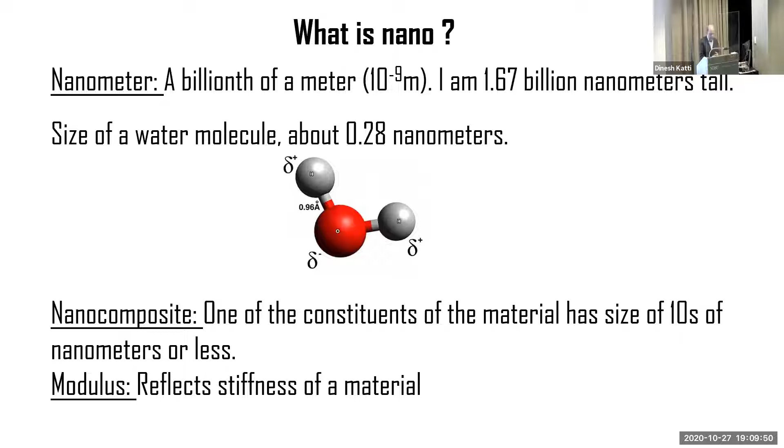So the first nanocomposite material I'm going to talk about is nacre, which is the iridescent inner layer of seashells. Now, seashells are these wonderful armor materials that protect the organisms that reside within them. The outer region of the seashell is a calcitic mineral, and this calcite is basically very strong and very brittle or very hard. On the other hand, the inner layer of seashell, which is called nacre, is strong and tough.

And now material scientists have been interested in nacre for a very long time. So the composition of nacre is 95% aragonite. Aragonite is a calcium mineral similar to chalk. And the remaining part of the nacre are organics. It's basically a cocktail of proteins.

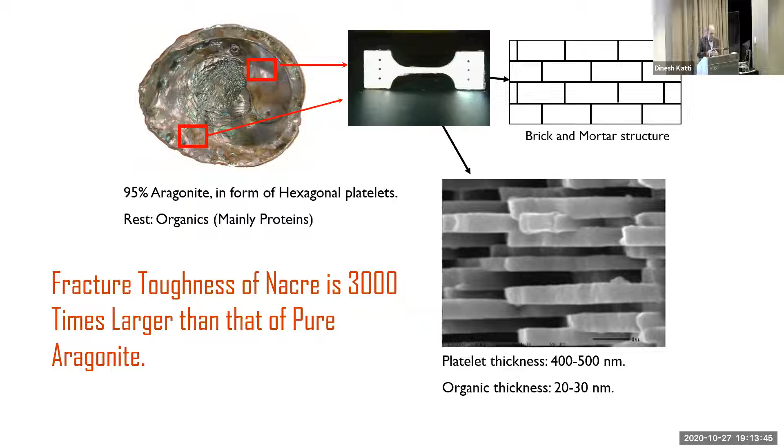And so we decided to use a radically different approach and use computations and mechanics to explore nacre and find and delineate the structural reasons why nacre has such amazing fracture toughness, or resistance to fracture. And so the first thing we did was to build a structural model of nacre down to the nanometer scale. And then we used, at that time, some of the world's fastest supercomputers to do our simulations.

And at that time, we did not know what the elastic modulus of that 20 nanometer thick organic phase was. And our simulation showed that the elastic modulus of this organic phase is about 20 gigapascals. Now, that number, 20 gigapascals, is about 1,000 times more than what we were expecting. And the reason why I'm saying 1,000 times more is because this organic mortar is made up of proteins. And if you look at the bulk proteins, they have elastic modulus of only 20 to 50 megapascals. That's 1,000 times less than this number.

Well, the first thing, of course, we did was to go and check all our numbers, whether our numbers were correct. And we were very confident that our numbers were right. And then we went ahead and presented this work in the fall of 1999 at the Materials Research Society with a high-profile Frontiers in Materials Research Symposium. And after we presented this work, about half the researchers in the audience could not believe that number. But there were several people in that audience who said, you know, this has never been tried before, using computations to explore materials. And you guys might be onto something.

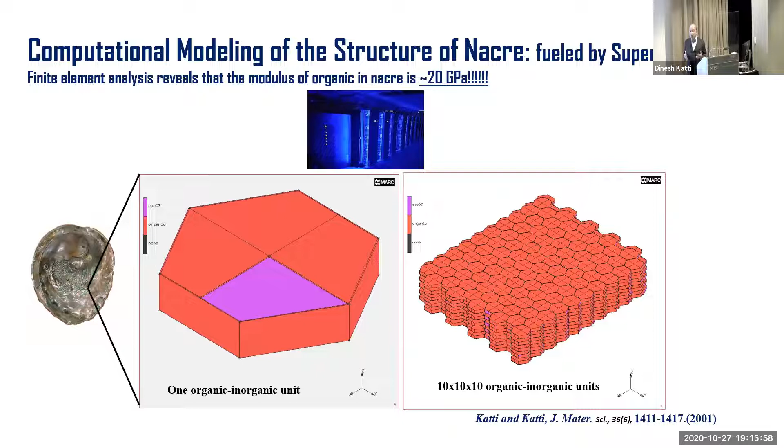Well, a year later, some experimentalists at some other universities actually did experiments to find the elastic modulus of nacre in the 20 nanometer size region. And they confirmed what we had predicted a year before. And that gave a big boost to using computations to explore materials. And then subsequently, other groups in the country also started using this technique. But this still did not answer the question why the fracture toughness is so high.

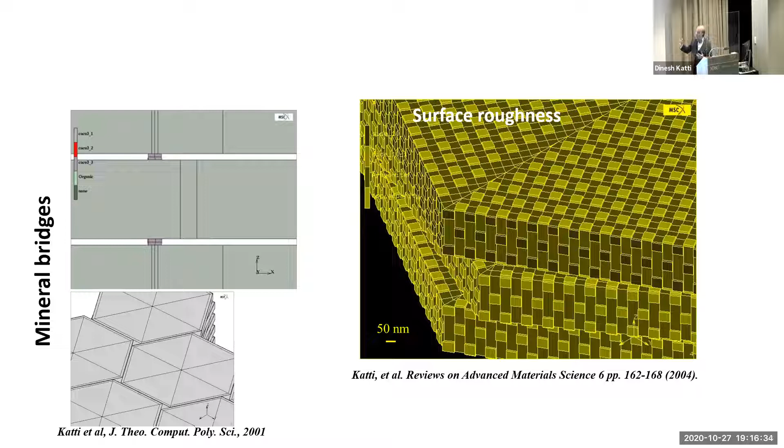And so we scoured the literature, and there were many speculations and theories that some features like mineral bridges, and mineral bridges are important for the growth of seashells, so mineral bridges or surface roughness might be the reason why we have this high fracture toughness. And so what we did was we built computational models of all these different features and tested them computationally and found that none of these contribute to the toughness of nacre. And so basically, we were at a dead end here. We did not know what to do next.

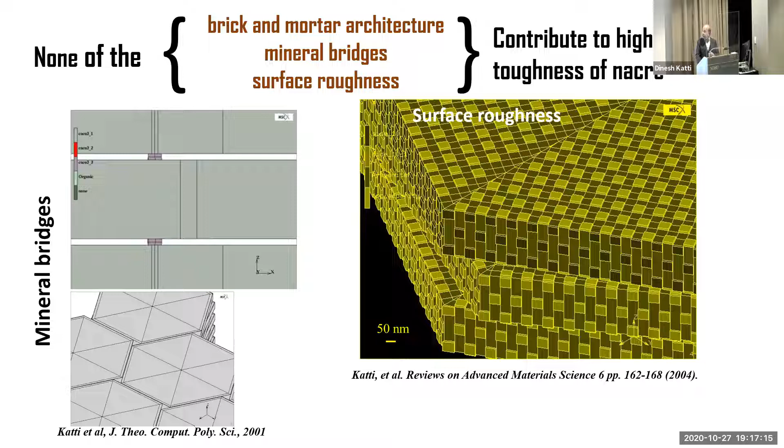But what we decided to do was to do our own experiments. We said, all right, let's do our own experiments, break the nacre, and look at the fracture surfaces. And then maybe that might give us a clue why the fracture toughness is so high. So what we did was, our students meticulously carved out the nacre samples from the seashells. And then we pulled those apart, put those samples in a scanning electron microscope and looked at the microstructure. When the very first image came on the screen, we just jumped out of our seats.

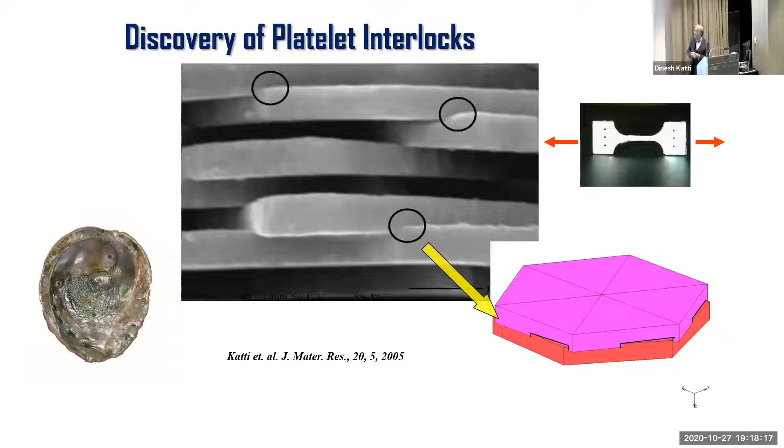What we saw is that these bricks were not just sitting one over another like a brick wall, but each brick was locked into the other brick. So the circles here show you how the bricks are locked into each other. So the bricks are not just sitting one over another, but locked into one another. Now, we wanted to be certain that this is the reason for fracture toughness. So we spent a year building models of these interlocks. And then we did our simulations.

And what we found is that because of the progressive failure of these millions of interlocks in this nacre, we get this very high fracture toughness. So basically, what our work showed is that the platelet interlocks are key to the fracture toughness and strength of nacre. And that was an incredible result because people had been trying to find the reason for high fracture toughness, and we were able to find that, and we felt good about it.

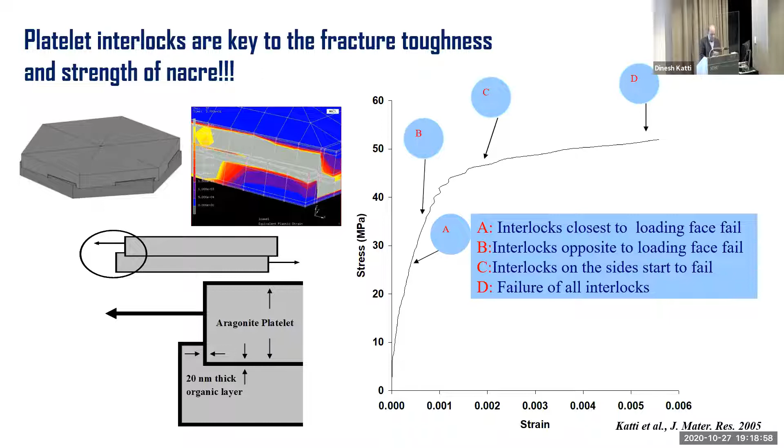But while we were doing our experiments, we found something else, which was very interesting. The mortar between the bricks was very stiff. It had an elastic modulus of 20 gigapascals, so it is a very, very stiff material. And typically when a material is stiff, it is brittle.

But here what we found is that not only is that organic mortar very stiff, but it can also deform a lot. It can stretch a lot. And that was fairly a unique property here. And so we decided to investigate this further. Why is it that this is happening?

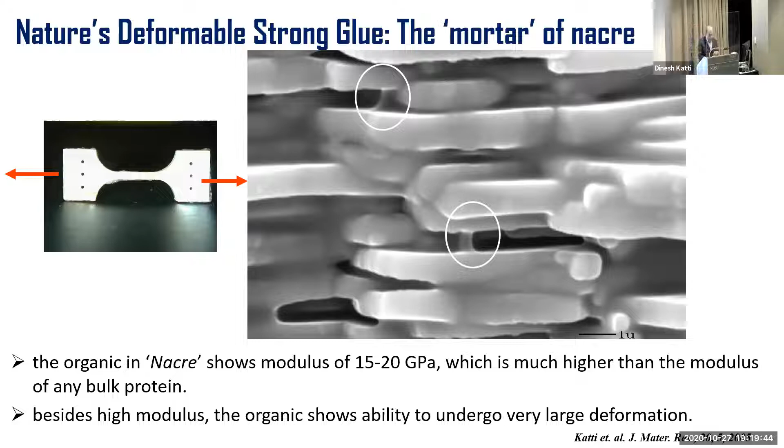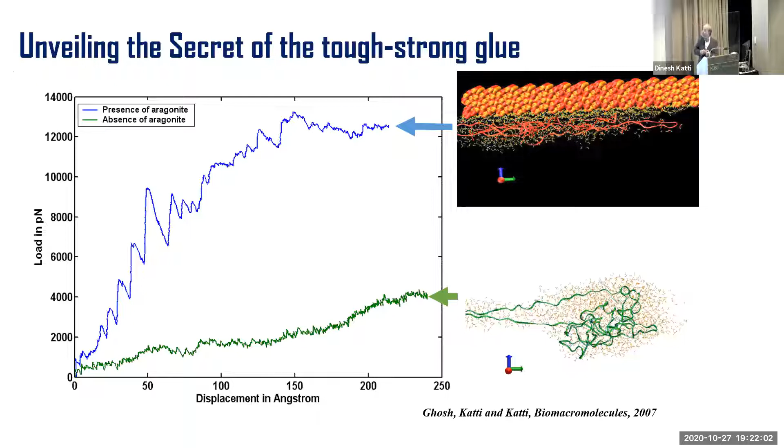And so this sort of answers that question, that why is it that the organic phase is very stiff, at the same time it can deform or stretch a lot. And so basically the proximity of that mineral actually influences the protein. And that was a big result that came out of our work. And so basically what we did was we wrote the recipe for the design of biomimetic structural nanocomposite. And with this recipe, now we can design new materials which are light and which are super strong.

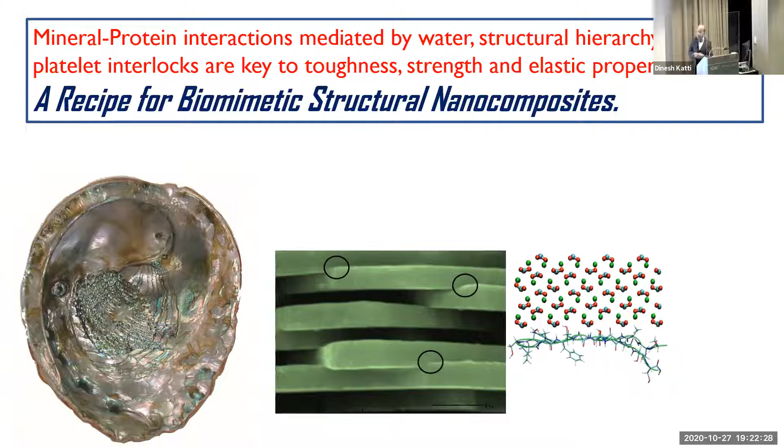And so one of the major defense contractors in this country has shown a lot of interest in the use of some of these findings in the design of the hulls for the next generation submarines. We also see the application of these materials for aircraft and spacecraft and cars and bridges and other structural applications. And we thought this was a pretty cool ending to that story.

The next nanocomposite material I'm going to talk about is the bone. Now, the bone is a composite material or nanocomposite material made up of collagen, which is a protein, and mineral, which is the hydroxyapatite, say, a calcium mineral. And the beauty about bone is that it has this structural hierarchy. Structural hierarchy means that it has organization at many length scales.

So if you see here in this figure, the left-hand side bottom, that's the molecular scale where you have the molecules of collagen, which is the protein, and then you have the mineral hydroxyapatite, which have the size range of nanometers. And so that's a molecular scale. So what happens is that we have an organization that starts from the molecular scale and goes all the way to the whole bone. And that's absolutely beautiful.

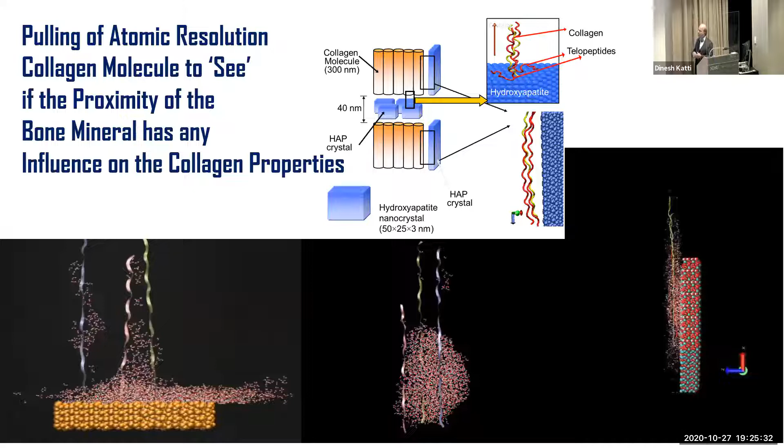for bone diseases. And so what we did was we pulled the collagen to see if the proximity of the bone mineral has any influence on the collagen properties. So basically what we did was we took the collagen and put it next to the mineral in all these different orientations which you see in the bone. And then we also compared that with the collagen without the proximity of the mineral. And we did that, and these are the results.

And basically what we found is that when collagen is in the proximity of the mineral, a much higher load or force is needed to pull that collagen compared to the situation without the mineral, just like in nacre. Okay, so again, we see similarities between nacre and the bone here. In fact, this is telling us that the mineral is influencing the collagen in its proximity. Now, up to this point, the collagen and the mineral were always treated separately.

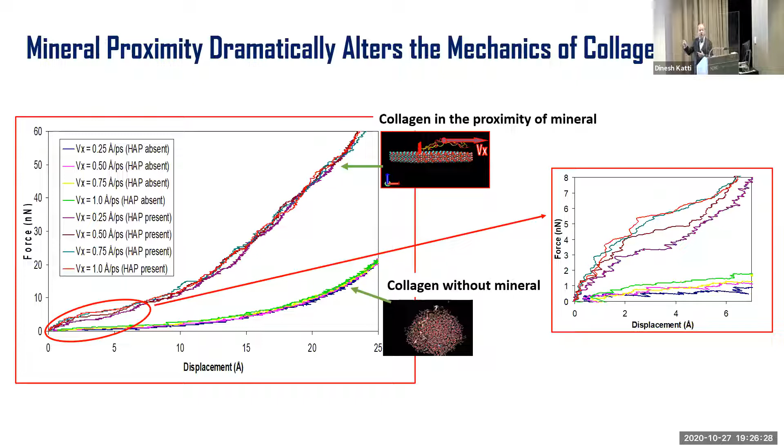This tells us that there's a very intimate relationship between the mineral and collagen, and that needs to be considered. But we wanted to see, so what's the connection between what is happening at the molecular scale and the bone itself? And to do that, we did what's called multi-scale modeling. Basically, in multi-scale modeling, what we do is to bridge what happens, in this case, at the molecular scale to what is happening at the next scale, at the fibril scale, and then to the bone. So we build these bridges between these lengths. And we did that, and we found something very interesting.

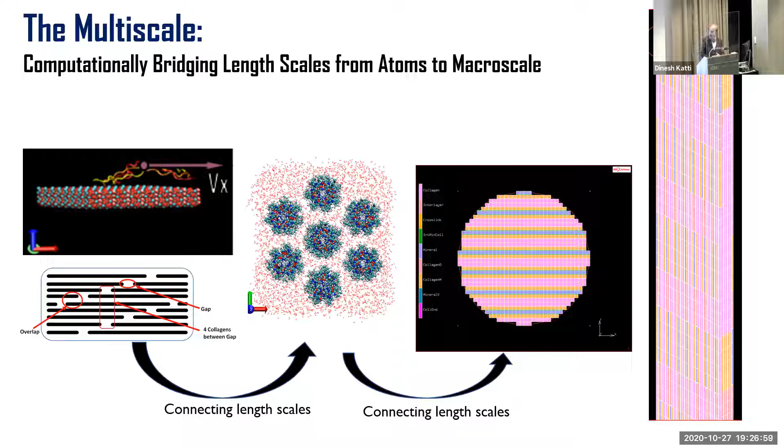We found that the mechanics of bone is dramatically influenced by molecular interactions between mineral and collagen. To give you some numbers, 20% of the elastic modulus of the bone is because of the molecular interactions between the collagen and the mineral. And you would say 20% doesn't seem like a big number. Well, that's the difference between the elastic modulus of a bone of a 25-year-old healthy male and an 80, 85-year-old osteoporotic female. So that 20% is huge, which means that the contribution of the molecular interactions between the mineral and the collagen on the bone properties is very significant. And so this changes the way we understand bone health and potentially cure bone diseases.

While we were studying the bone, we were intrigued by this collagen, which is one of the two components of the bone. And collagen also happens to be the most abundant protein in the human body. Now, at that time, when we started investigating, all the literature, all the work that was being done was on the short 8.5 nanometer long representative collagen molecule segment. In fact, the actual collagen molecule in the bone is 300 nanometers long. And so what we decided to do was to build a full-length collagen molecule and do molecular dynamics simulation. It's extremely expensive. We need high-performance computers, supercomputers, to be able to do that. But we were able to do that.

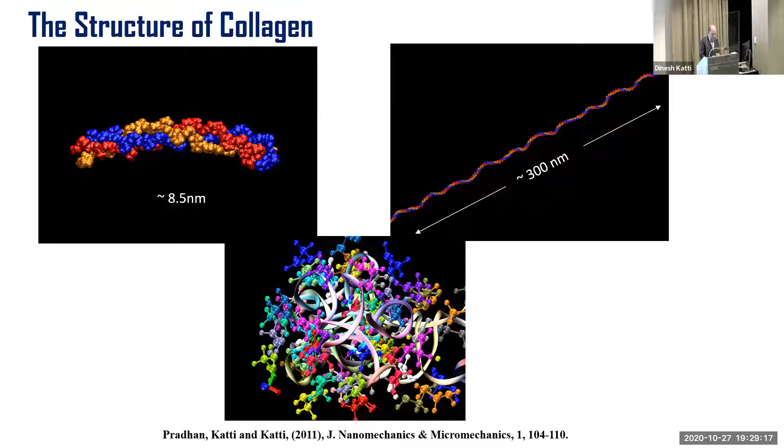So let's first see what is collagen. Collagen is made up of 3 strands of proteins. Each strand is a helix. So it has this turn, so it's a helix. And the helicity in this strand is a left-handed helix. Now these 3 helices get together to form this famous triple helix in collagen. Now this triple helix was discovered by Professor Ramachandran at University of Madras. And at one time, it was even called the Madras helix. This is the structure of collagen, the most abundant protein in the human body.

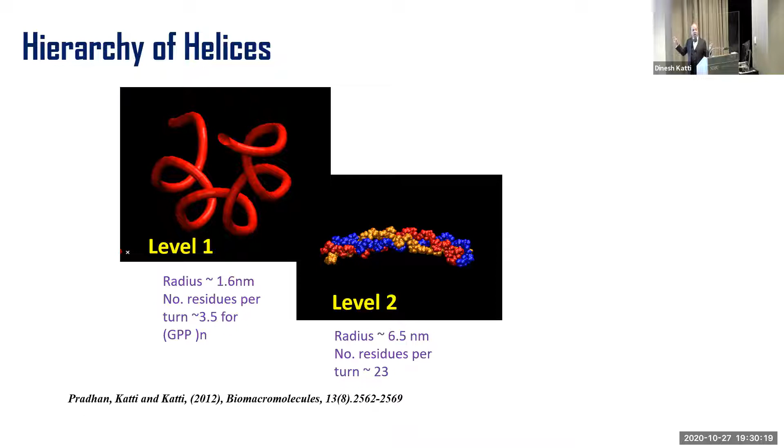And so what we did was to run simulations for the full length 300 nanometer long collagen. And so we did that. And what we discovered was that there was a third level of helicity in the collagen. So basically, this triple helix twists at a pitch of 15 nanometers. So not only do we have this triple helix, but the triple helix itself twists in a right-hand helical manner. And so that was a major discovery coming out of our group on the collagen. But then, like every engineer, so what's the point? I mean, what does that mean?

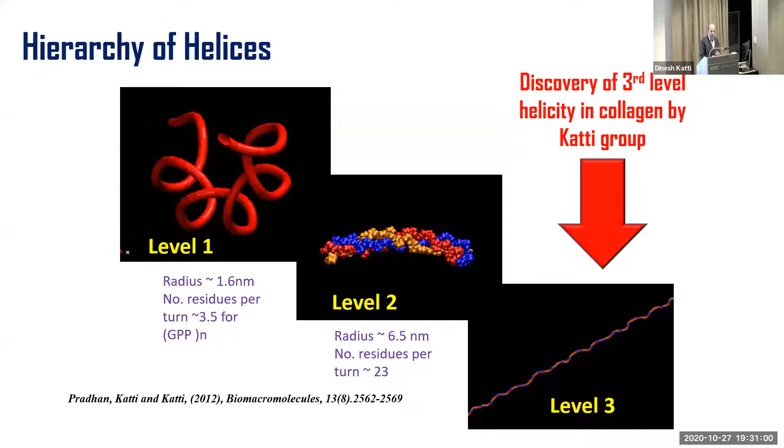And so we did a lot of simulations, and what we found was that level 3 helicity contributes to almost half of the total deformation or stretch of the collagen in bone. So that is significant. And up to this point, it was not even known that there was a level 3 helicity there. But the level 3 helicity during the normal day-to-day activities of a human being contributes to half of the stretching or deformation.

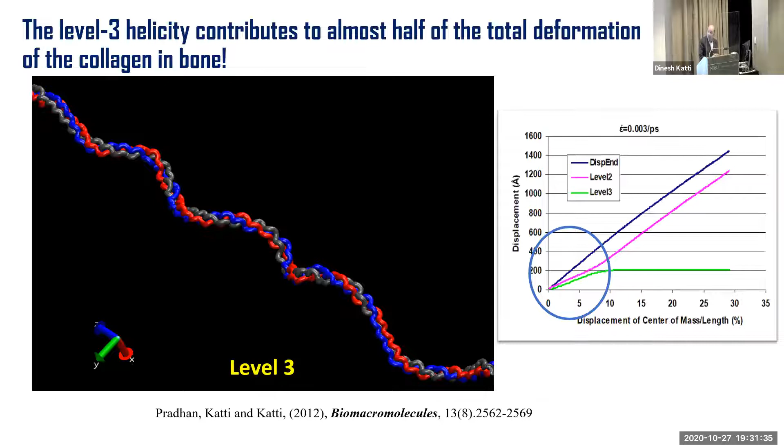So the takeaway or the summary of this work on bone is that mechanics of bone is significantly influenced by molecular interactions between collagen and the mineral. Interchain, non-bonded interactions, hydrogen bonds, and structural hierarchy control collagen mechanics. And level 3 helicity of collagen has important structural implications in bone mechanics.

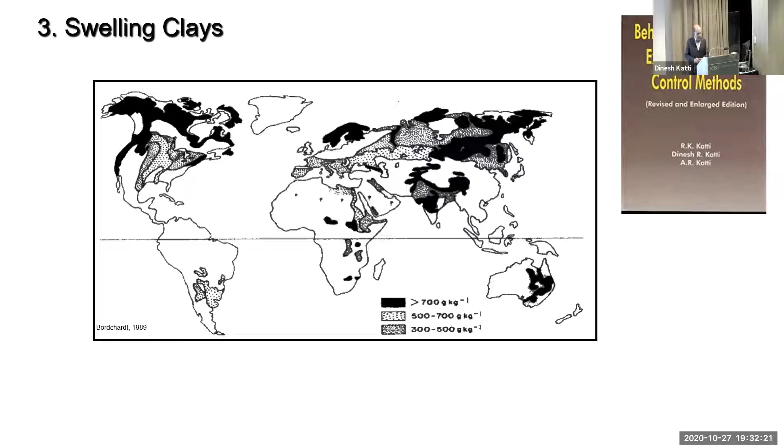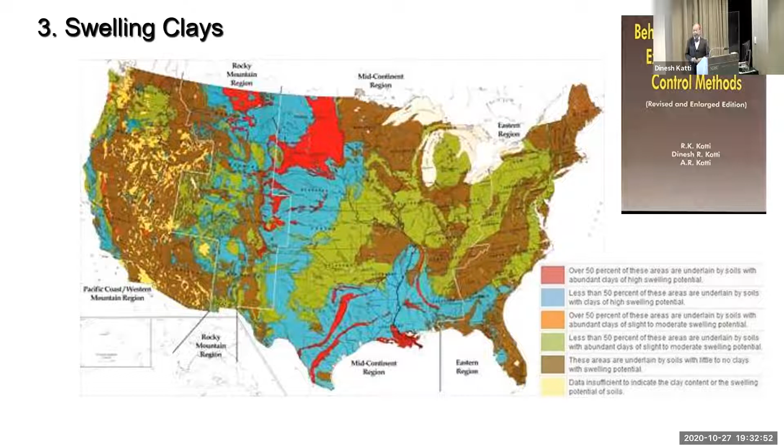And so when water enters these clays and hydrates them, the swelling clays swell. And because of that, the ground heaves. When the ground heaves, it causes damage like cracks in buildings, cracks in roads, sometimes failures of structures, landslides. So a lot of these things happen because of the swelling of these swelling clays.

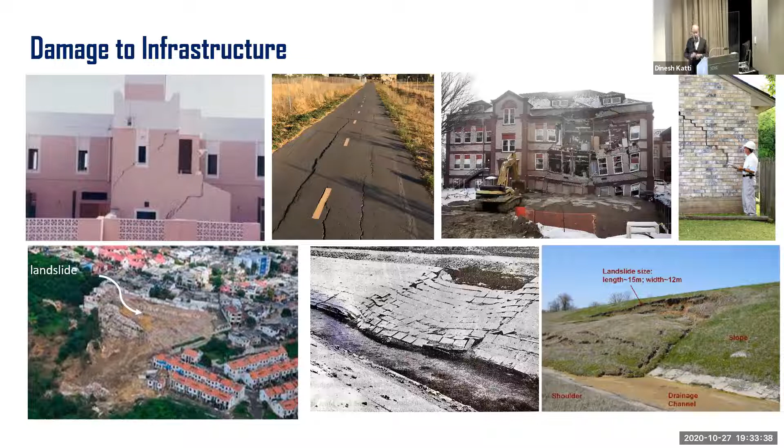In fact, the damage caused by swelling clays is of the order of $20 billion every year in the United States alone. So that's huge. And so the problem is that the current soil mechanics theories are incapable of predicting clay behavior. I know it's a bold statement, but that's the truth. And this results in poor design of infrastructure. And this is a challenge for the $10 trillion per year global construction industry.

And so because of the magnitude of the problem, we decided this is a challenging problem, we need to work on this. And so what we did was to do a very fundamental study of clays, trying to understand the relationships between the clay fluid molecular interactions and the engineering properties of clays. And in order to do that, we introduced molecular modeling or molecular dynamics in the field of geotechnical engineering.

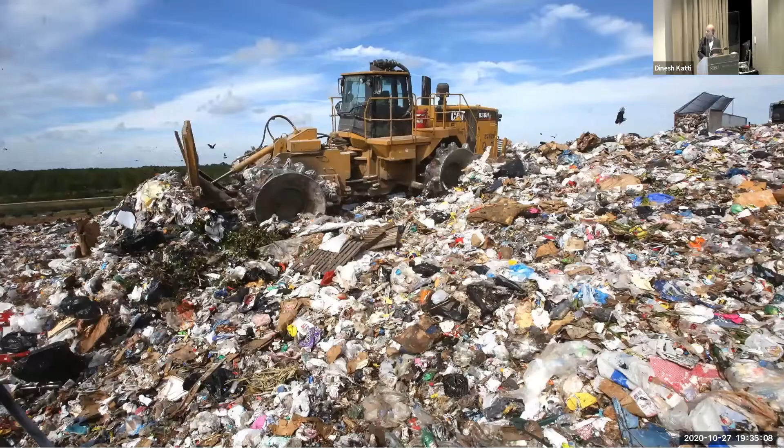And from that work, what we found is that the molecular interactions between clays and fluids not only significantly influence, but control the engineering properties of clays. So I'm going to give you one example of how molecular interactions control engineering properties of clays, and that's the flow of fluids through clays.

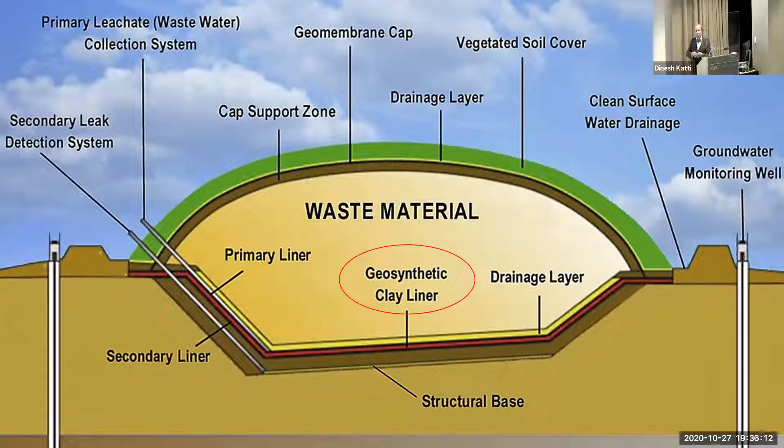And so what you see here is garbage in a landfill. Now, the landfills are lined with what's called a geosynthetic clay liner. Basically, it's a liner made up of swelling clays. And the point of having that liner is to prevent the fluids in the garbage or in the waste material from flowing through and contaminating our groundwater. So we wanted to see how the fluids which are typically in a landfill are interacting with the clays in the clay liner.

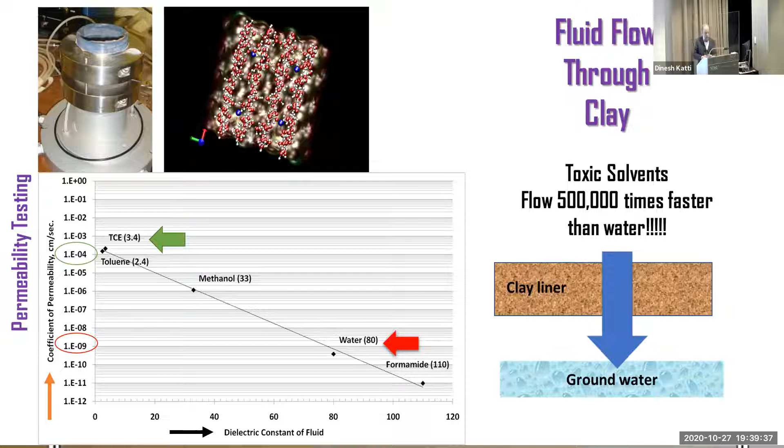On the other hand, when you look at toxic solvents like TCE and toluene, actually EPA has called both TCE and toluene among the top 10 most toxic substances found in our landfills. When you look at TCE and toluene, that number jumps up from 10^-9 to 10^-4. It's a huge jump. In fact, if you look on the right, toxic solvents flow 500,000 times faster than water through this clay liner. That's huge.

And so what does that number, 10^-4 centimeters per second, mean? Well, if you go to a beach, take water and pour it on the sand, the water simply percolates very quickly through the sand, and it disappears. Exactly the same thing happens when TCE or toluene is poured on top of the swelling clay. Basically, the swelling clays in this clay liner are ineffective in preventing these very toxic solvents from flowing through. They're great at stopping water, but they're ineffective in stopping these solvents which have very low polarity and don't interact much with clay. So again, the question, why does this happen?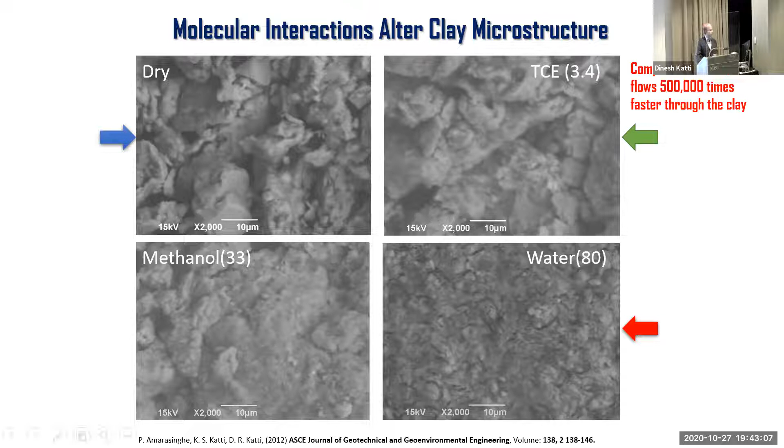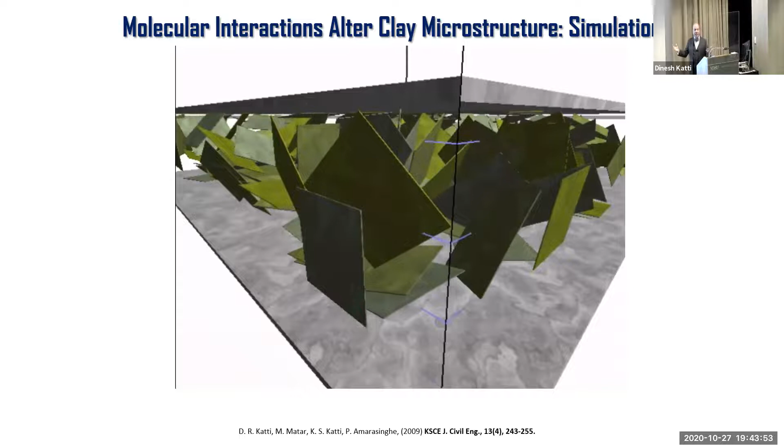So now we also did discrete element modeling simulations, and you can see those void spaces being filled up by broken particles. So the particles which are broken down, they fill up the void space and basically seal off the clay and prevent water and other high polar fluids from flowing through, creating a perfect barrier. So because of molecular interactions, particles break down and fill up these void spaces and seal off the clay. But non-polar fluids which do not have very strong molecular interactions with clay do not break down the particles and do not create this perfect seal. Okay.

Now we see the same type of thing happen with compressibility of the clay, the compression of the clay. And we find that clays, depending upon the nature of the fluid in the pores, compress more or they compress less. And again, that has to do with the molecular interactions between the clays and the fluids. So basically what we have found again here is clay with polar fluids, that is the fluids which interact the most with clays, are less compressible. But if you replace the fluids with low polar fluids which interact less with the clays, you have more compression.

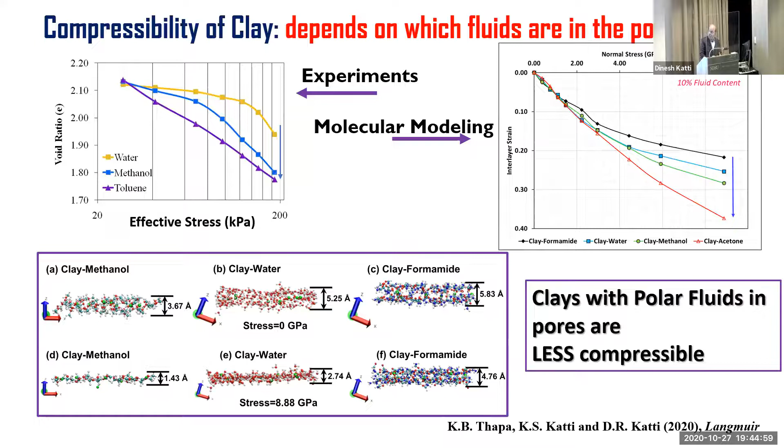So that's another engineering property. An important engineering property in addition to the flow properties is the compressibility. And we see exactly the same thing happening for the strength properties. Okay, so basically what's going on is molecular interactions are changing the microstructure of the clay, and those in turn change the engineering properties of the clay, and also the molecular interactions directly alter the engineering properties of the clay.

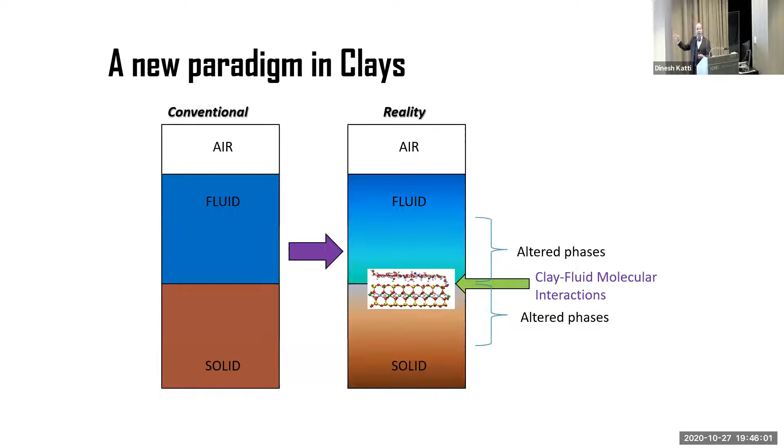Now, the engineers, the people who are designing with these clays, are used to this clay as made up of three components: air, fluid, and solids. That is conventional soil mechanics. But what we are saying, based on all this evidence, is that clay-fluid molecular interactions are key for accurate prediction of clay behavior. So if you do not consider clay-fluid molecular interactions in clays, you are not going to be able to accurately design with clays. And so molecular interactions control properties of clays: soil mechanics revisited.

Now, the last nanocomposite material that I'm going to talk about are polymer clay nanocomposites. When you add small amounts of nanosized clay, we are talking about 1 to 10% or less, and the key is nanosized, that's important. If you add small amounts of nanosized clay in a polymer, which could be nylon or polyethylene, the common polymers, there's a 500 to 600% increase in the elastic modulus or the stiffness of the material.

So why is it that when you add very small amounts of nanosized clay, we see this huge jump in mechanical properties of the composite? Well, polymer clay nanocomposites were developed by Toyota Motor Company in 1990. And really nobody knew why this happens.

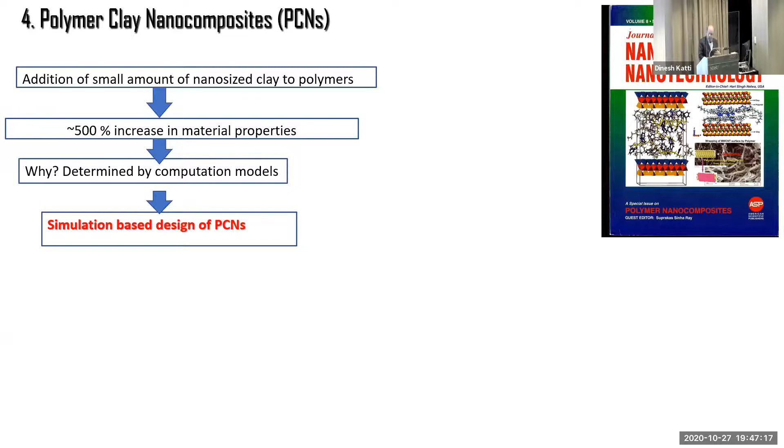And so we decided to take on that challenge. And what we did was, again, a huge amount of simulations. So we got down to the molecular scale, studied the interactions going on between the polymer and the clay and the modifier and all of that. And we also built multi-scale models, basically models that span different length scales. And from that, we came up with this

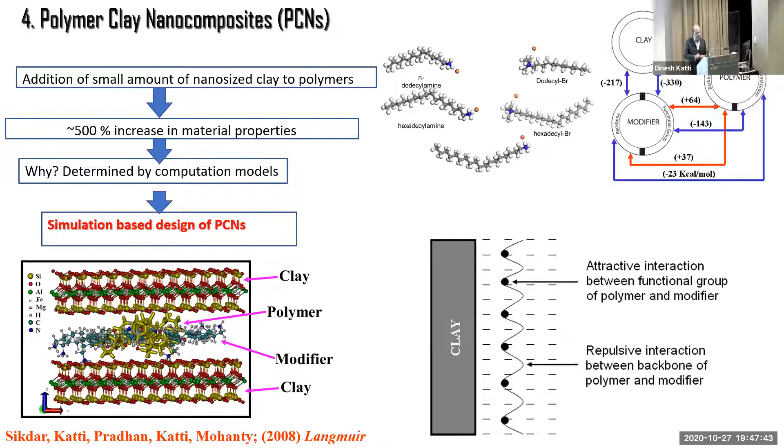altered phase theory. Now, it looks like sunny side ups, but this is our altered phase theory. It's one of those situations when you sit down at a desk with a student, you're discussing something, you sketch out something, and then that ends up in the paper, and then it becomes something everybody agrees about. Anyway, so the yellow yolks which you see here represent the clays.

And the light blue is the polymer. And because of the molecular interactions between the clay and the surrounding polymer, a large volume of the polymer is altered. The mechanical properties of the polymer in the altered zone are many times more than the mechanical properties of the unaltered zone. So what is going on is, these clays, when they are well dispersed, and again nano-size, actually alter the polymer.

And so we call this an altered phase theory, because these clays are actually altering. And that's the reason why, when you add small amounts of clay and the clays are well dispersed in the polymer, we see this huge jump in the mechanical properties of the polymer clay nanocomposite. So subsequently, we took this theory and built simulation models so that we could design polymer clay nanocomposite materials with tailored, predictable properties for structural applications and so on.

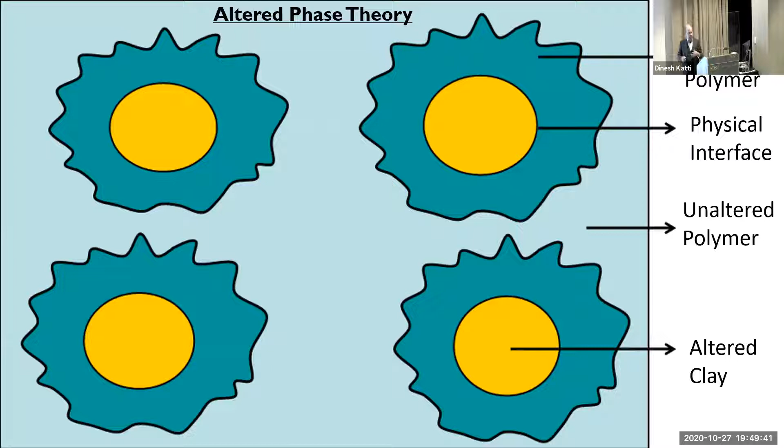But we also decided to use polymer clay nanocomposites in tissue engineering. Now, let me briefly tell you what tissue engineering is. In tissue engineering, we take cells from a patient, and then we grow those cells, and the cells proliferate. Basically, they make more cells. And once we have a sufficient number of cells, we seed them onto what are called scaffolds. Scaffolds are simply very porous structures, a material and a structure with a lot of porosity. Almost 90% is air.

And then we give it heat, proper temperature and food, and the cells grow in the scaffold and they make tissue. Now, as the tissue is made, the scaffold starts to degrade. And we want the scaffold to degrade because we want the tissue to take the shape and form of the scaffold. And so somewhere in between, we take the scaffold and put it back into the patient. And so now the patient has a tissue made out of his or her own cells. And that is tissue engineering.

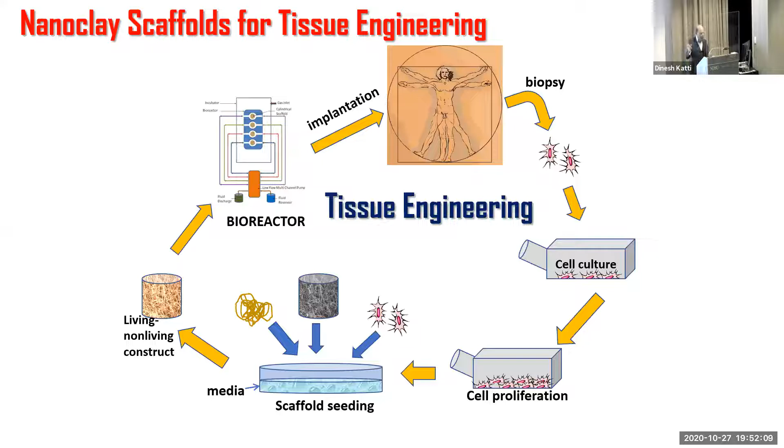Now, several years earlier, it was just one of those intellectual curiosities about whether the amino acids in the proximity of clays can make polypeptides or proteins. There was some speculation, some theories that clays are the reason why amino acids get together and make proteins. And we said, can we simulate that? And what we found is, yes, the proximity of the amino acids is such that you could create the polypeptide bonds and probably make proteins. But something else we found is that amino acids can make nanoclays from clays.

Now, amino acids are biocompatible, and clays themselves are biocompatible. So now we have nanoclays that are biocompatible. So we immediately remembered these simulations which we had done. Actually, in 2007, we published this work, and then we had just forgotten about it. This is one of those papers that had got a lot of citations, but we just didn't think much about it until we came across this problem.

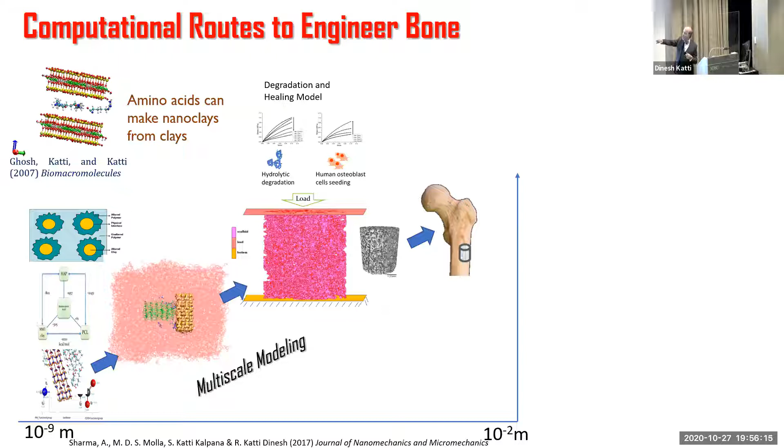So we wanted to provide those tools, and we were able to do that through what we call multi-scale modeling, where we bridge what happens at the molecular scale all the way to the implant scale. So we are able to do that.

Now I'm going to show you some pretty pictures. I think they're pretty. The picture on the top is a picture of the nanoclay scaffolds. Those are the scaffolds. The picture in the middle shows the human mesenchymal stem cells growing on these scaffolds. They're attached to the scaffolds and they're growing.

And the bottom right picture is the picture of the regenerated bone when you look at it through an atomic force microscope. And this regenerated bone has the same hierarchy as that of a natural bone. It has the same beautiful hierarchy. It has all of those features. Not only that, the mechanical properties of this bone are the same as that of a natural bone.

So basically, we have regenerated natural human bone from human mesenchymal stem cells on our nanoclay scaffold systems, and we also have all of these predictive capabilities in order to do that. And now, of course, this work is going further. The regenerated bone work is going further. We are now going into a translational mode where we are taking these scaffolds, putting them into animal models, and working with some companies on that.

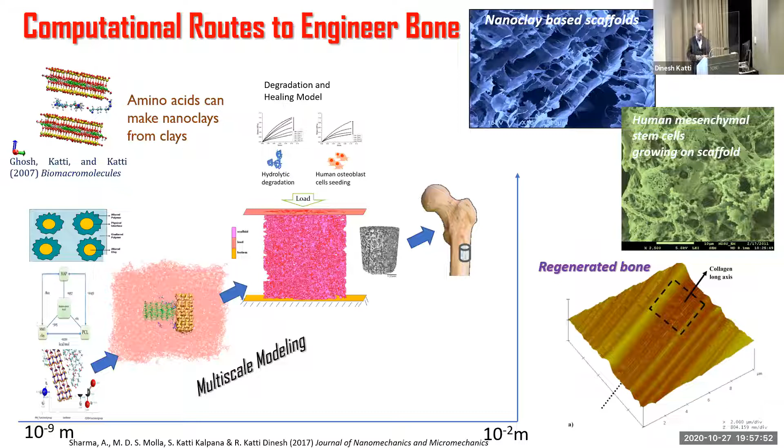Now we have created this beautiful natural bone in the lab, regenerating natural bone. Now this regenerating bone is also a niche for prostate cancer and breast cancer to go to or migrate to. That's metastasis. So both prostate and breast cancer can eventually migrate to bone, and when that happens, it's terminal. At this point, there is no cure when that happens.

So we said, all right, these two cancers actually like the regenerating bone environment. How about we put these prostate and breast cancer cells on this, seed them on this regenerating bone while bone is being regenerated? So we did that. And when we did that, we found that we were able to create the tumors and the cancer environment just like it happens in real life, in the bone. So these were the first test beds for cancer bone metastasis, which came out of our group.

And of course, the advantage of this is that we can use it for understanding cancer biology. We can use it for designing new drugs and so on. And we made use of this. So we made use of the tumors from our test beds. And what you see here are the cells within the tumor.

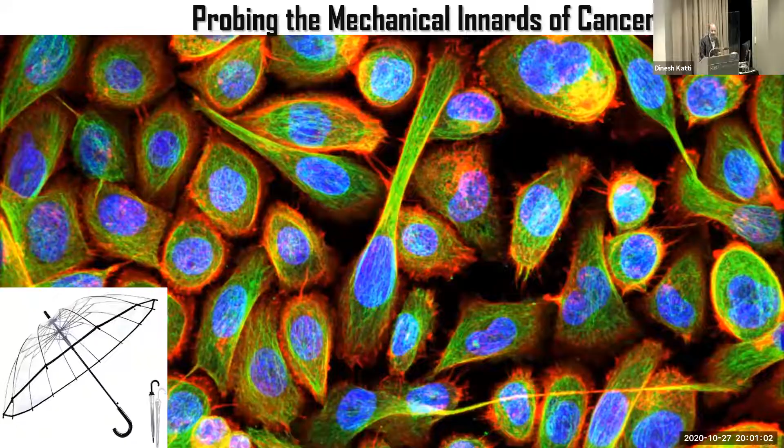so what we did was to build the first high-resolution mechanistic breast cancer model of cancer cells. So basically, on the left-hand side, you see a cancer cell attached to the scaffold. That's a breast cancer cell. And on the right-hand side is the model, finite element model of our cell. And this cell has all of the mechanical features of interest for cancer cells.

So it has the cell membrane, it has the cytoskeletal elements like the actin filaments, the intermediate filaments, the microtubules. Then also it has the cytoplasm and then the nucleus. So basically this cell can capture all of the internal structure necessary for the mechanical response of the cell.

And what you see down there, the figure at the bottom, is the simulations where we have taken an indenter, or we are pressing the cell down. Okay, so we are pressing that cell down. And as we press the cell down, we can go inside the cell and see what's happening to all of these different cytoskeletal elements. And so we can get a very good picture of how the cell responds when it is subject to external stress conditions or loading.

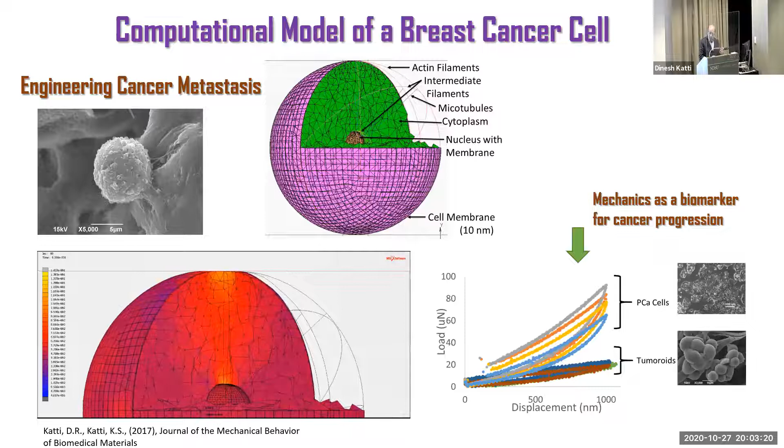Okay, so now we go even deeper. We go inside the cell and look at one of the cytoskeletal elements, and that is actin. And why we are interested in that: left-hand side top is the picture of actin, which is spread throughout the cell. But when the cells get together to form a tumor, that's the figure on the left bottom, the actin migrates to the cell boundaries. So it's no longer distributed throughout the cell, but moves towards the cell boundary.

If we are able to capture this actin dynamics, that is the changes to actin from cells to tumors, we'll be able to do a good job with predicting cancer progression. And so on the right, this is just hot off the press. You are seeing the actin molecules being stretched and pulled and twisted, and we're trying to understand the mechanical behavior so that we can feed all of that into what we are seeing on the left-hand side.

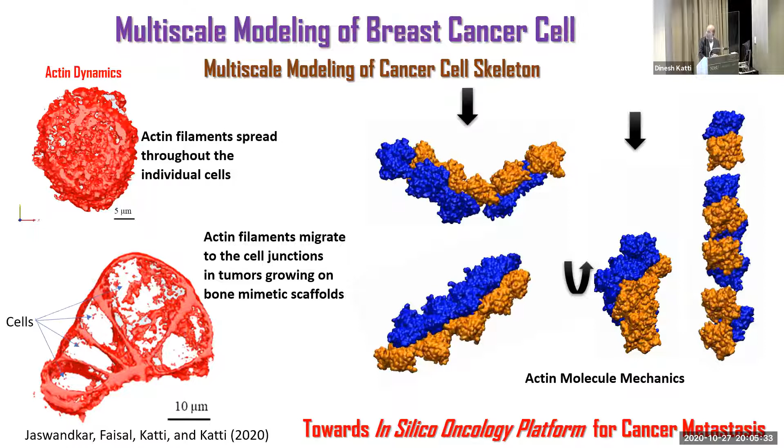Well, the takeaway from the research on these 4 nanomaterials is that hierarchy, the hallmark of structural biology, as well as structural nuances, influence mechanics of biological systems. And molecular interactions alter phases and control mechanics in nanomaterials, irrespective of the origin, whether it is biological, geologic, or synthetic origin. And so that's a paradigm shift in mechanics.

Well, somebody famous said it was the best of times. But I think it is the best of times, because today we have powerful computers, computational tools, and science to design materials with unprecedented properties to make this world a better place. This was the tale of 4 nanomaterials.